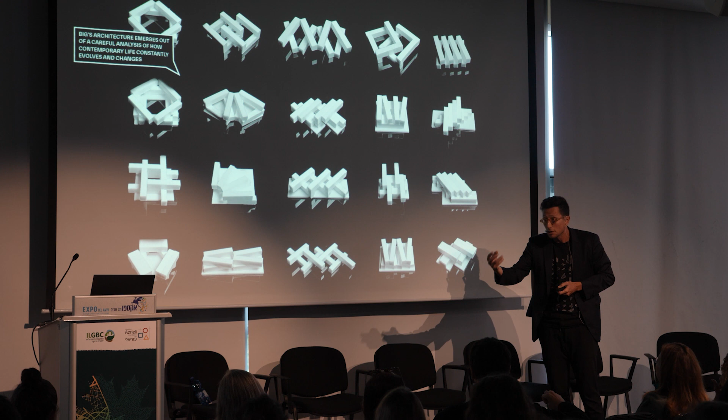Our process, as I was saying earlier, is one of trial and error—nothing is prescribed. We go through research in the first 3 weeks, then try several schemes, testing one against another to see which performs best at multiple levels. In the end you do a selection of 3, and then select the final one that performs the best. This one was Teva.

That never happened, and now we have more opportunities here, but this was the reason we came to the Southern European market—to be able to contribute in this region too. We work across all scales, trying to contribute at every level.

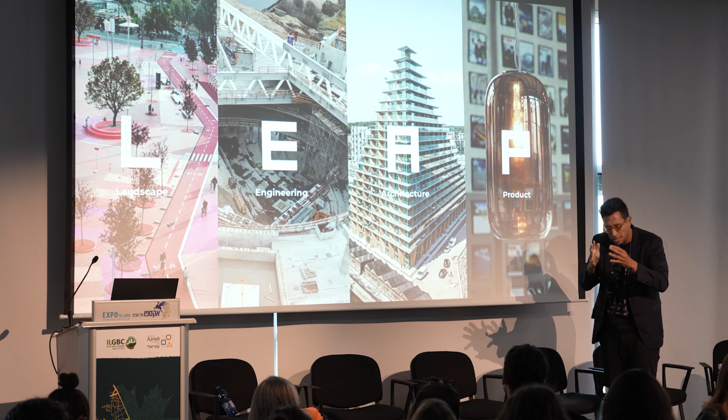We have a group of engineers, structural and climate engineers in-house, a group of landscape architects, because landscape has always been part of everything we do. Of course we're majority architects, but we also design at the scale of the product. It's really holistic thinking, applying the same process of creating value at all different scales.

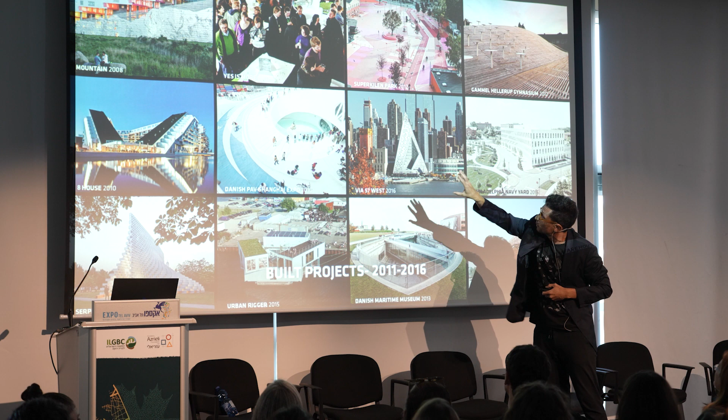This was us when we started in 2005, with the Mountain, the 8 House, and the Expo and an exhibition. By the time we opened New York, again starting with the most basic form of architecture—housing. West 57 is again housing, but creating value through structural design, vertical structure, MEP, and all sorts of things that require simplicity.

London: the gradual increment of projects increased as the offices appeared, and in the end, as I mentioned before, the architecture looks different because it performs differently. We work at the level of community—from the harbor, from harbor baths to parks—and at the level of energy.

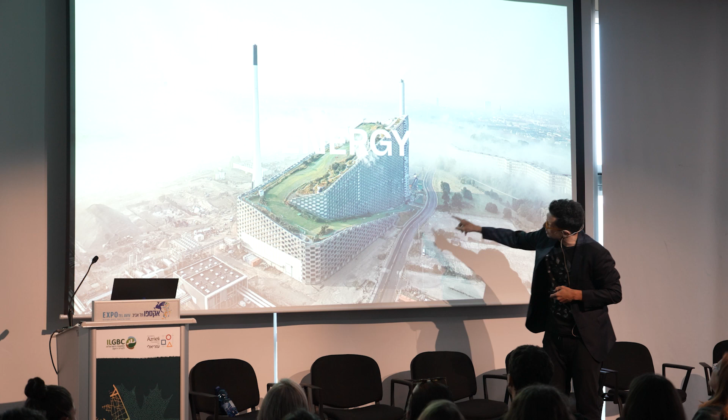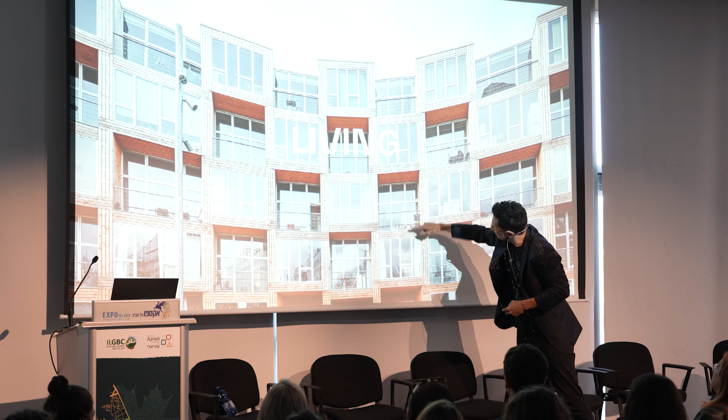This is a waste-to-energy plant, which you can ski on the roof of. At living, this social housing in Copenhagen, you clearly benefit from prefab structures—by thinking of the logic, you create 3.5 meter ceilings in your living rooms. You just have to think a little differently with the ingredients you're given.

Workplace—this is Google in Mountain View. Again, flexibility, shaded by a solar dome.

Towers—this is West 57, where the building creates views, trying to preserve views also for our same client on the back, towards the Hudson.

Culture—this is a museum in Norway, in a sculpture park, that is both a bridge because it connects to the sculpture park, a museum with 2 sizes of galleries, and a sculpture in itself.

Hospitality, which I'll come back to also in Sweden, gastronomy with Noma. Stadia—this is the Oakland A's, where you can walk on the roof, so rather than being a white elephant in the middle of the city, it actually becomes a gift to the city.

So again, this idea of social benefit with social opportunities with every single project, and resiliency - the big U that protects Manhattan from floods while supporting or enhancing the relationship of the city to the sea, mobility with Hyperloop, and urbanism with Toyota Woven City, and many other things.

And I'll come back to many of these, but none of them is doable without dialogue. Dialogue with fantastic clients - two-thirds of our clients are repeat clients precisely because of that, because we nurture a conversation where we really can create transformation together.

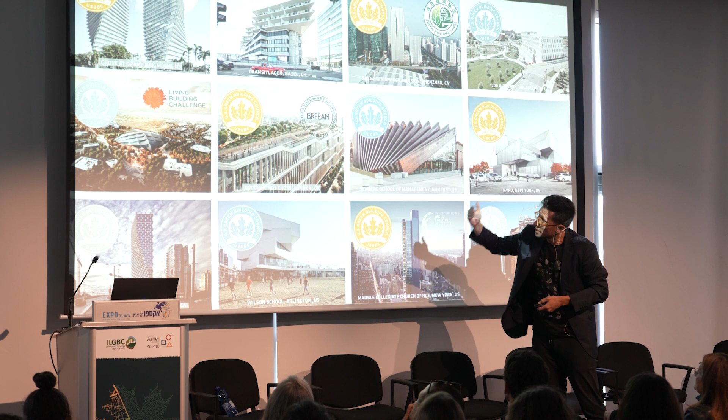And ultimately, as I mentioned already a couple of times, the buildings do look different because their performance is tailored to their own environment. Therefore, at a very early stage, when you start assessing, they already hit LEED Golds and Platinums, even without implementing expensive MEP. So it's more like the passive strategies that are in the backbone of the architecture we're creating that creates different architectures and performative architectures.

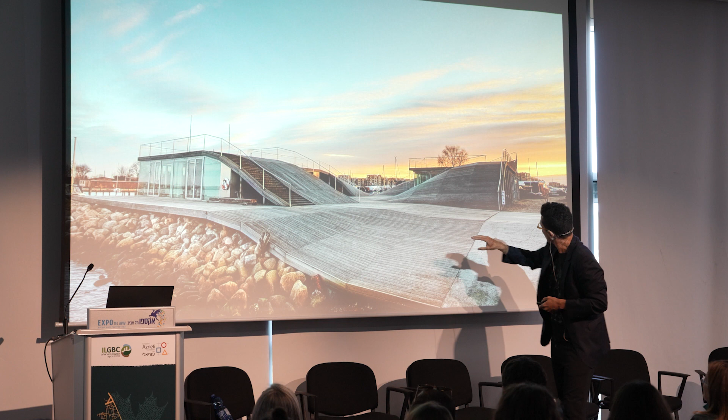So maybe to start with the origin of BIG, nearly 20 years ago, the first project that Bjarke did in Plot was this Maritime Youth House, where the competition for the project was to remove the soil - contaminated - and a large part of the budget was to remove it, then do a small little building on top. Rather than doing that, we proposed that instead of wasting money moving soil, we would actually cover the soil. And it is that same cover that creates new opportunities - shelters for cafes, for the kayaks - and becomes a playful environment where children actually use and create value by thinking about the budget differently.

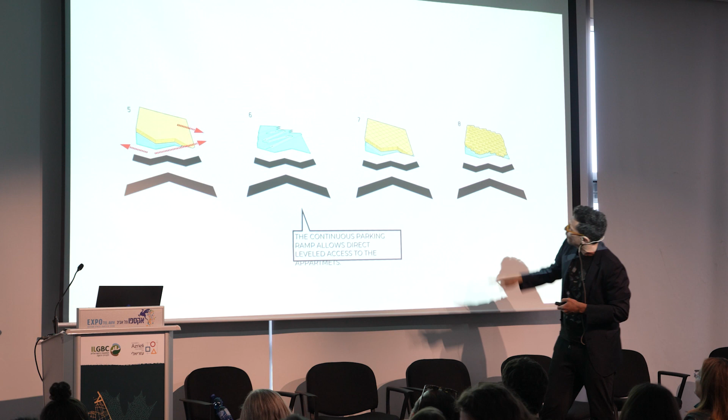So this is another form of rethinking what we're being given - the Mountain, where it was meant to be a parking house owned by the municipality and homes owned by a private developer. Instead, we proposed that the parking house would be inclined to enable the homes to face south, the best solar exposure and the best views, meaning that you can ramp all the way up to your floor and everyone has a home with a terrace with incredible views.

And what is interesting is that it scales from the scale of the urban development to the single family house scale of the surroundings.

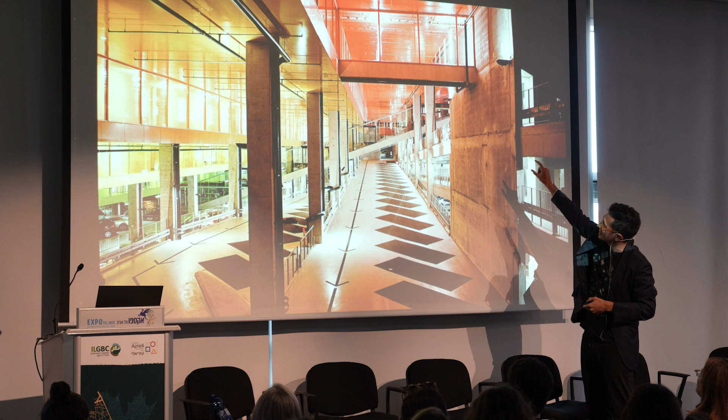When you go up, you travel in this diagonal lift that is actually a standard product in Switzerland. That was my home, 303. I sold it before I moved to Barcelona.

And when you enter, you're actually in this isolation. It's really an oasis, looking into greenery, looking into landscape.

And what is fun is also that these are very basic planters below. So this is a story almost about water usage. The plants are all self-sustainable because the bed of the terrace is a sand bed that slows down the water filtration, meaning that we reuse all that water into creating this Cambodian temple that, yes, is full of spiders, but is also full of nature and joy. So that's just to show that there's opportunity in everything to create self-sustainable systems that enhance biodiversity and create well-being and biophilia.

Then also, one of the first towers that we did was this project in Shenzhen for the Shenzhen Energy Company. We won the competition because we proposed this - it follows the master plan.

It's a very simple building that faces south and north. So towards north, we proposed that the facade would be a zigzag facade, like a pleated dress of Issey Miyake, that towards north is fully glazed, towards south is fully solid. There's no mechanisms, there's no moving parts. It's a strategy of a simple building that is only solid towards south, towards the sun, and glazed towards north.

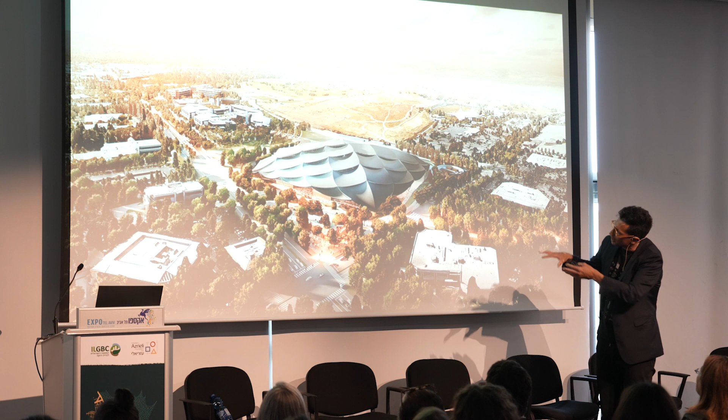And so what makes the building perform beautifully is also what makes it look beautiful, right? And so in that extent, it became a transformative tool also in the thinking of larger scale projects. And that same knowledge, almost at a different level, was what we were discussing when we started discussing the offices of the future with Google in Mountain View.

This is the building finished last year. Every single square meter of the roofscape is solar harvesting. And when you enter inside, it is designed from the single worker, creating a platform that enables change, because they don't know what next month or next year, how they will organize and which clusters they need to be researching on.

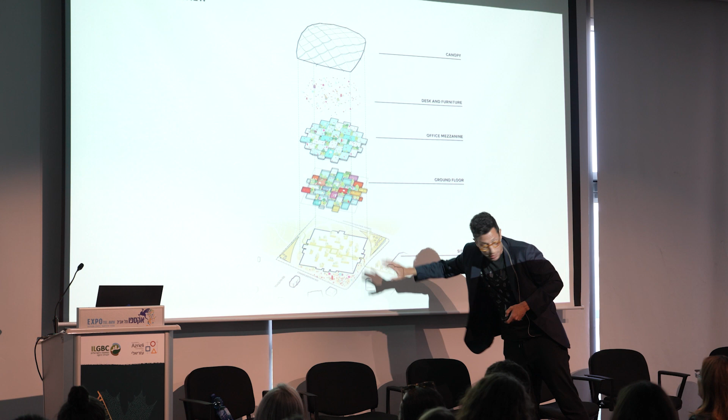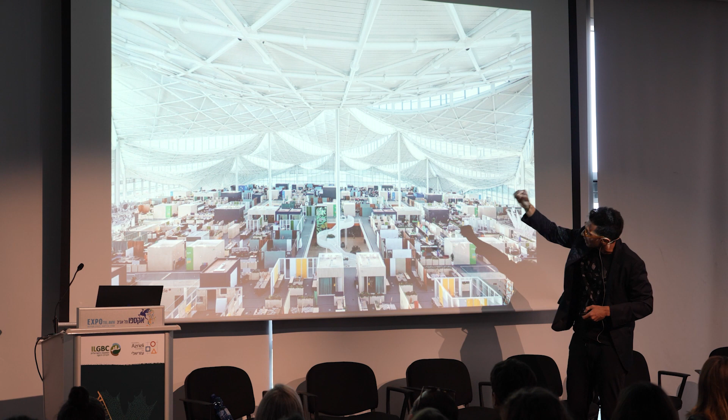So it's just a cover of working environments above with amenities below, and the lower space is completely public. In the end, you have almost like a circus tent that is catenary to minimize the structural impact and the materiality, and below everything is flexible of change. So these are the spaces you have, render and reality from the exterior and the interior.

This is Bjarke on top of the PV shingles. These are PV shingles that we've also developed with a company that is now offsetting and selling them. They're scales, but they all harvest energy and enable you to do all sorts of different things. And of course, there's water drainage as well as it harvests energy.

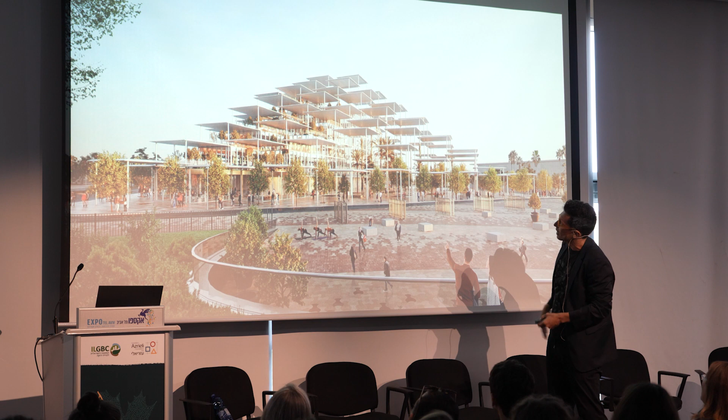And the same logic in a different constellation was what we've done for Sevilla, as I was talking before. This is the future home for the Joint Research Center in Sevilla. Looking at the human scale level, it's transparent, shaded, almost like a light canopy that protects the building underneath. In the front you have this plaza populated by colonnades of trees and colonnades of columns, and on the back a garden for the users, for the JRC community.

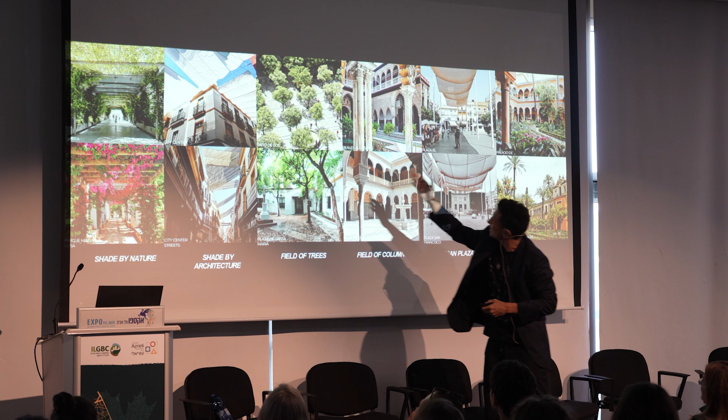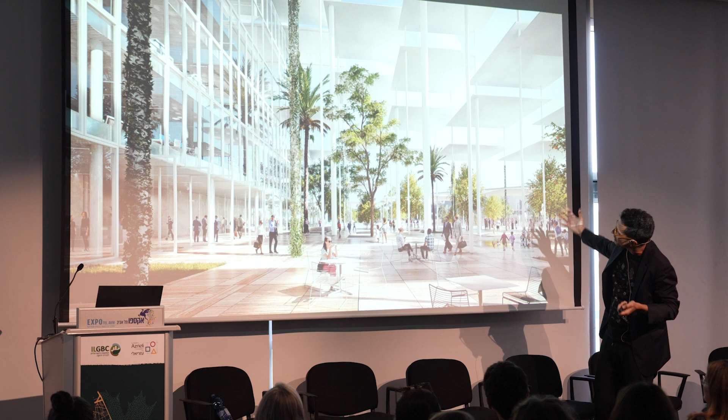It all started, as I was saying earlier, by analyzing what Sevilla is like. It already has these colonnades, vernacular colonnades, contemporary colonnades, natural colonnades, and shading elements. So it's the mixing and mingling of nature and man-made solutions to provide shade. In a way, the building uses that same DNA in its backbone, and we've done that by covering the entire site, harvesting in its totality the sunlight.

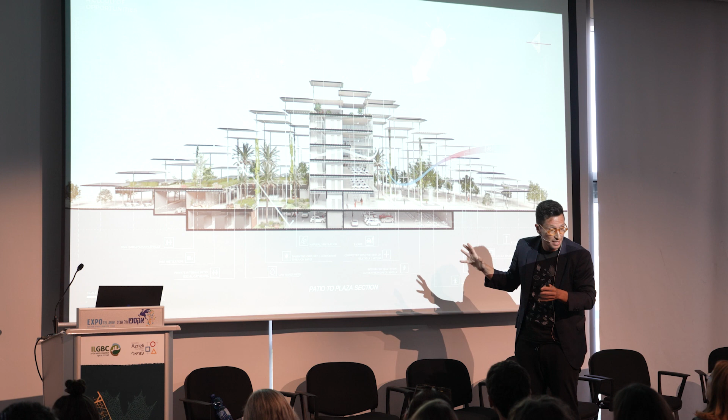So here you see that the canopy that protects the public realm is the same canopy that protects a very simple building. The architecture is extremely simple. And precisely because it doesn't cast direct sunlight, it enables us to have more glass. It enables us to consume less artificial energy because you're using daylight. Also operable windows—all the basic systems and strategies.

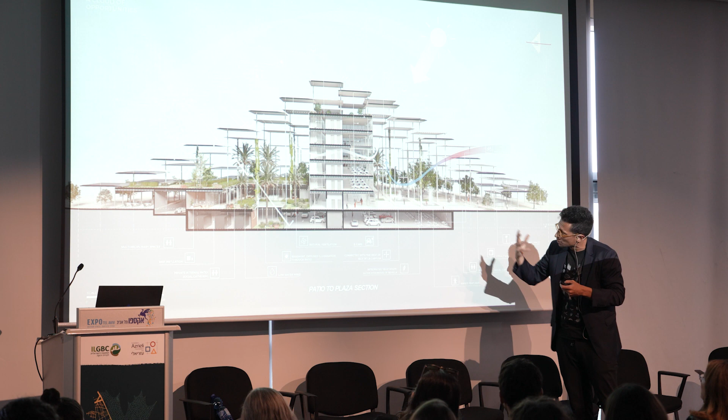Water collection also happens in the pergolas, not only sun but water, and all of that gray water is reused into the gardens in the front and in the back. So all of this is a collection of passive strategies that enable the building to have a very contained performance and a very high energetic harvesting.

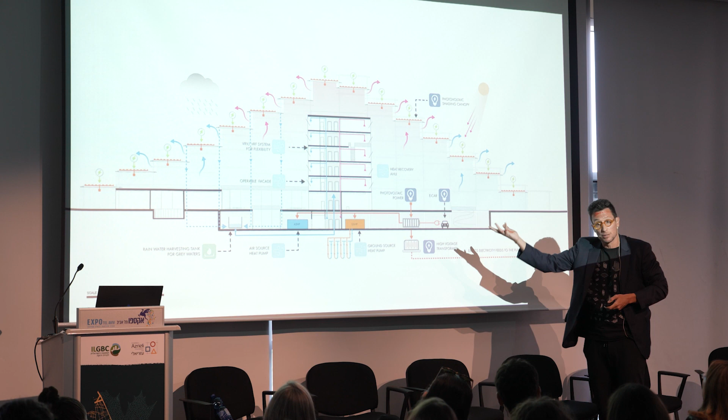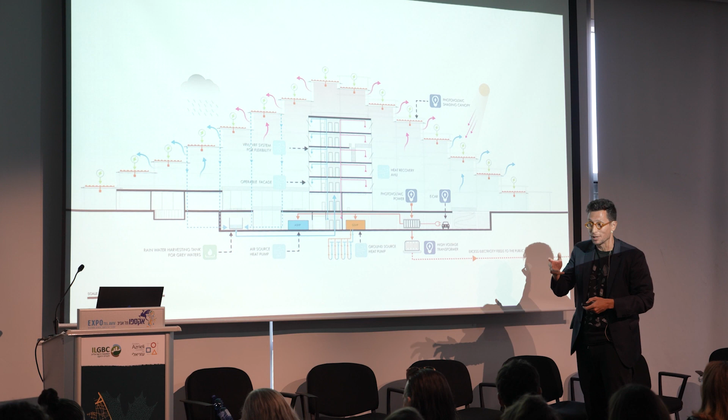And that brings us to that 50 plus extra energy that is going back to the city. So if all projects think that they need to produce a surplus, not just to break even but to actually contribute, our conversation about energy supply, demands and necessities would be a completely different one.

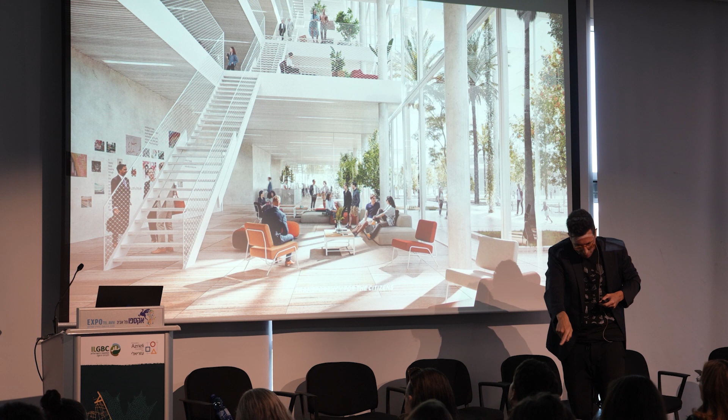So in the future, when you enter you'll be able to park your bike, promoting soft mobility, when you enter the lobby. You'll also have almost like not a vertical void, but a diagonal void, where you can actually see your friend and your neighbor downstairs and meet in the space next to it. So it actually promotes vertical congregation, what otherwise would be a segregated community.

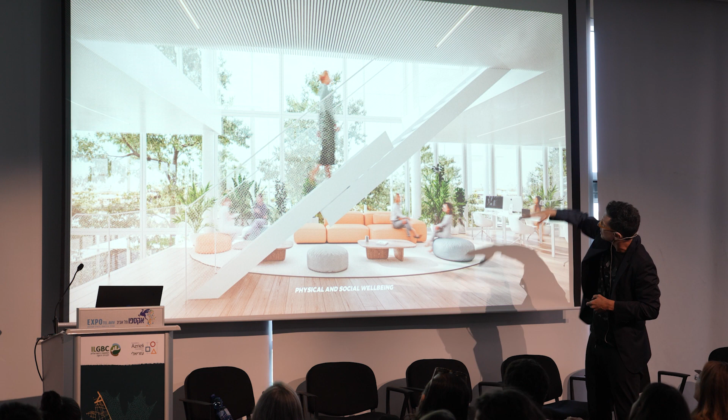So you see your colleague one or two floors below or above, and you might be able to take the stairs. In this transition is also where you have the hangout spaces, but the office space again is flexible. So the future of the spaces is flexible spaces, providing a canvas for transformation.

And then on each side, the building really does this stepping because it follows the canopy, creating terraces on both ends with incredible views towards the city. So it's this added value, this addition of opportunities on all different fronts, that by just opposing the canopy with the logic of the building creates this new set of opportunities.

And then, of course, Nir Lechem, who is an Israeli architect that came from Moshe—Moshe Tzur told him, if you're leaving me, you should join BIG in Barcelona. So he did. Nir was working on JRC in the competition, and he's now running the project on JRC. So he's trying to learn Spanish.

On campus, I think the logic of solar shading and comfortable communities came through this campus for education and sports that we're doing in Cyprus, which is a renovation of an old stadium and a new area for an athletics club, with an addition of program. Again it's akin to what we're doing across Southern Europe and the Mediterranean. Cyprus is extremely warm, so what we created is a constellation of programs spread throughout the campus, connecting the more urban area to the more park-like area.

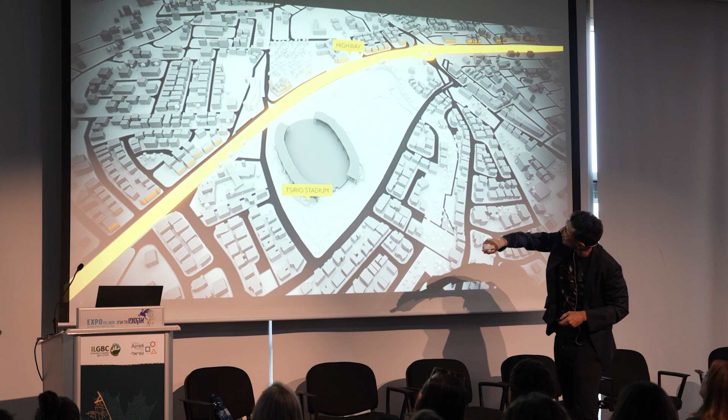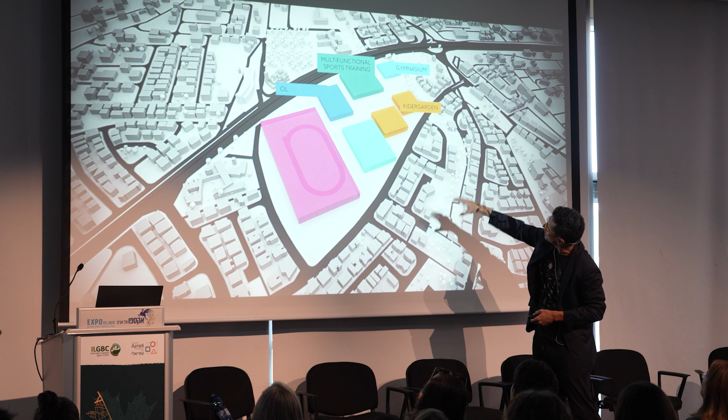On one side there's the highway, so people will arrive at the stadiums from two ends, walking through the existing, almost thin water line, which creates greenery. Then there's the creation of schools focused on sports, with a component of education and a large component of well-being across different types of sports. So if you're focused on training, you can grow there, learning on all fronts.

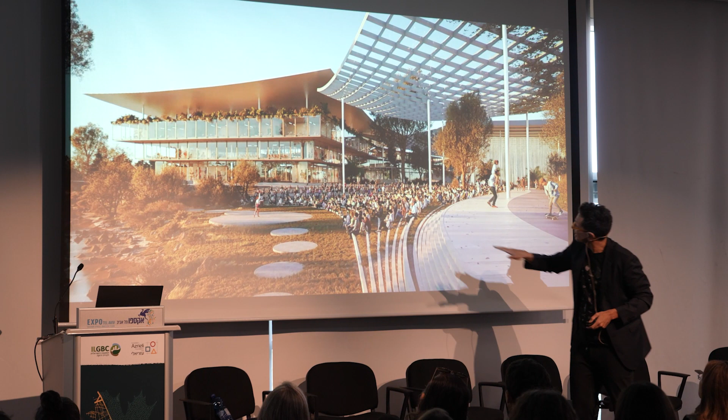So this is a renovation of a stadium. The schools also create a series of different opportunities, connected with this idea of living on a campus. The same applies to the pool. Each program explores that architectural principle in a different manner.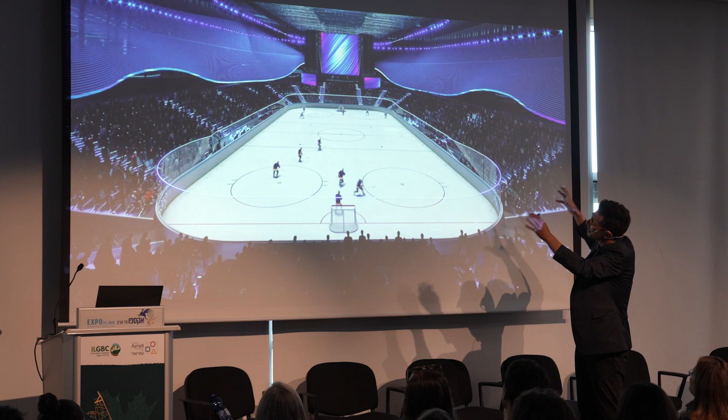Then there's an ice rink that is also capable of doing different things. In the stadium, you can actually access it three-dimensionally all the way to the top, so you can walk all the way up. Even with the ice rink and the pool, there's 20,000 square meters of additional PV-supplied energy.

So at the ground, you see this walkway, and above, it's completely shaded.

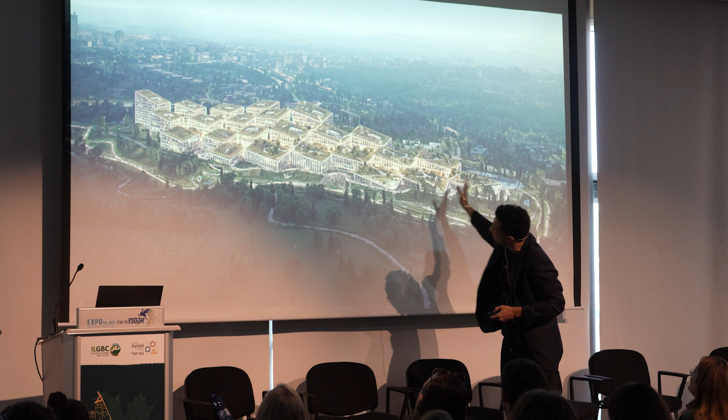The building balances its own square meters rather than being a flat four stories. On the side of the highway it rises to double height, and on the side of the river it decreases to human scale, so you can walk up. This protects from highway sound and enhances the relationship with the river. When you walk through the central street, you see all the way down to the river as the buildings decrease in scale.

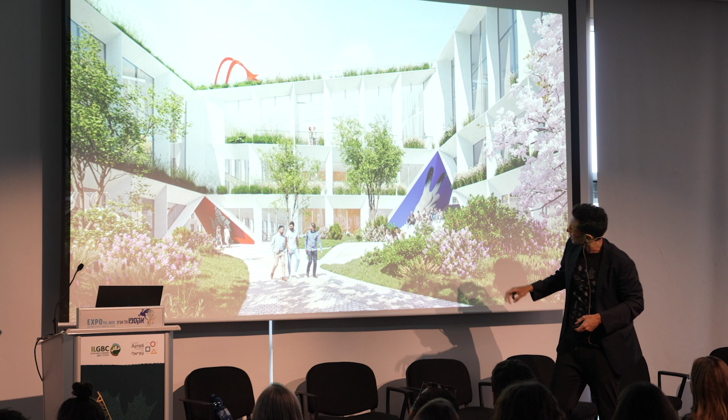You start having larger plazas, cut underneath so that you connect to the next, smaller plazas. The building works as many buildings, but also as one building because they're all connected as a single office space for different departments.

At the ground level, all plazas are connected by structural gates that are new art opportunities—we're inviting several different artists to experiment. Above, the roofscape is all one continuous surface, so you have constant daylight, constant connectivity, and constant exposure to your colleagues.

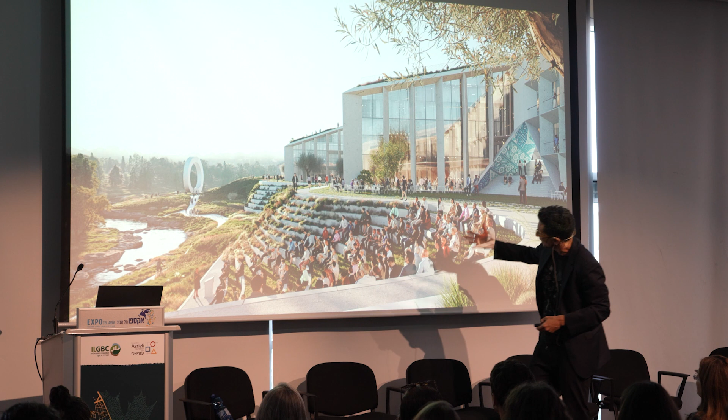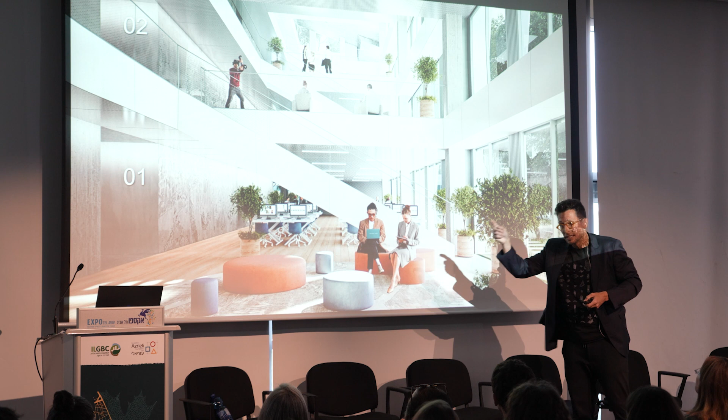As you arrive at the riverfront, where the buildings are smaller, you also have a new set of opportunities, where informal auditoriums will protect you from extreme rainfall, as just happened this winter in Portugal. It creates this whole new set of opportunities and relationships with nature. Similar to JRC, we often explore this idea of a traveling void that promotes connectivity throughout the vertical building.

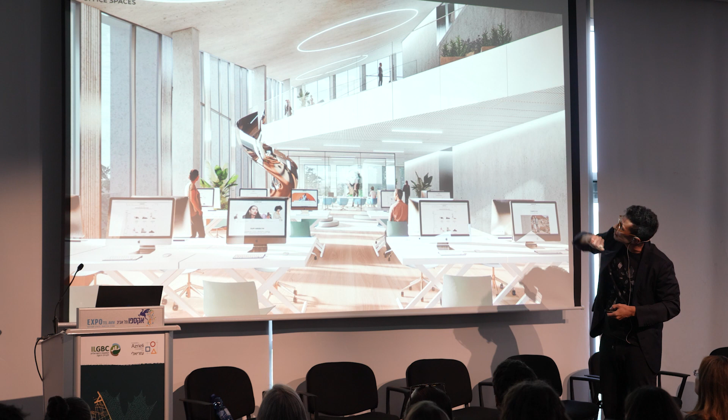Above all these moments where it meets the inclined roof, you have these opportunities for new types of mezzanines, and when you arrive on the very top, you can exit the building again. So you can enter and exit the building either from below or from above. The middle space is just a connection in between a park experience or an urban experience.

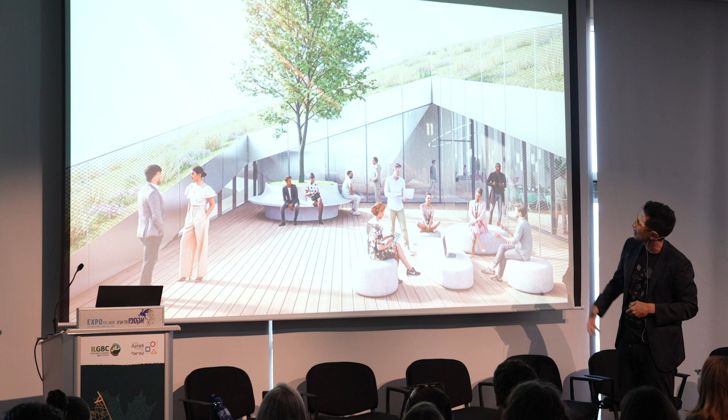Above, each building has these terraces that oversee out into nature, so you can actually run all the way up. At the riverfront you have a different set of amenities, from auditoriums to canteens to kindergartens and well-being. In the end, the art gates are just a setup for whoever wants to, or whatever artists want to experiment.

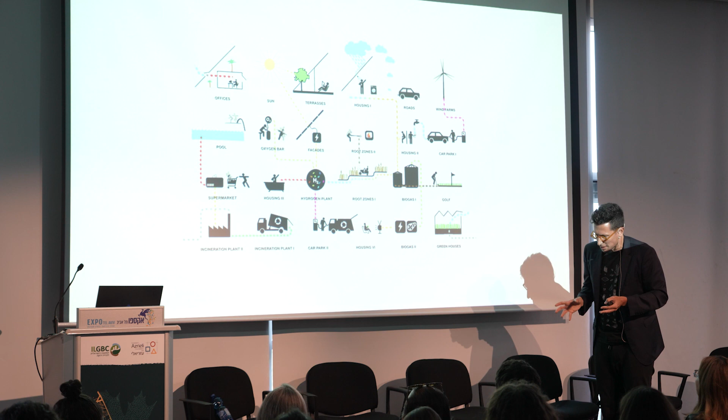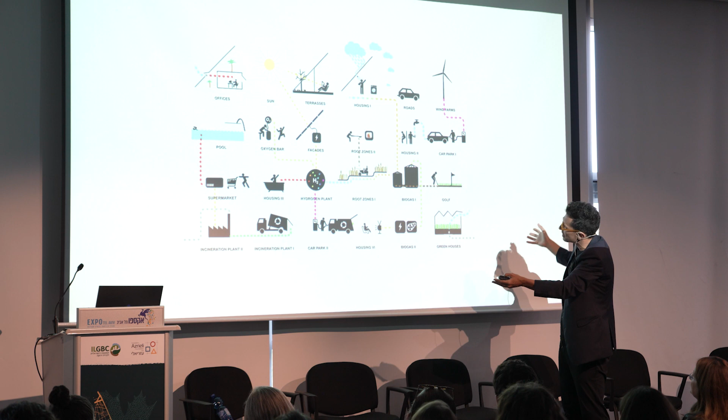I think ultimately, if you look at sustainability, the further you look into not buildings but campuses, you're looking into a toolkit of ecosystems. It's not going to be just PVs, it's not going to be just A or B. It is really a system of synergies that need to feed into one another.

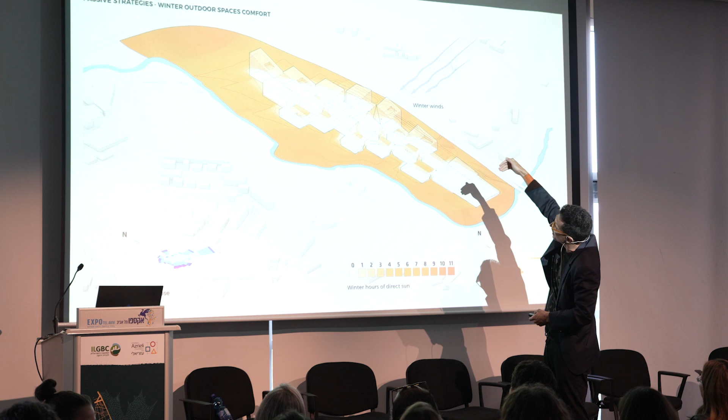So what we've done, once we were looking into passive strategies, you realize that the south summer breezes, we started working on them to be perfectly aligned with the gates, meaning you have the summer breezes breathing into all the plazas, onto the back. The north wind was protected against—we have the nortada, the cold wind in winter, that is completely protected against, so we don't have gates on the north parts. In a way, it creates microclimates that are beneficial for different phases of the year.

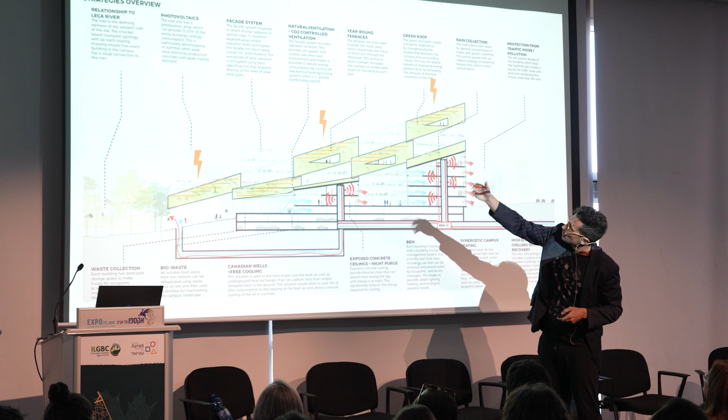And then within, the campus has a series of different strategies, from PVs to the facade, cross-ventilation, green roofs, water collection, thermal mass, and all sorts of Canadian wells and bio-waste, that actually harvest the cooling from the river into the building itself.

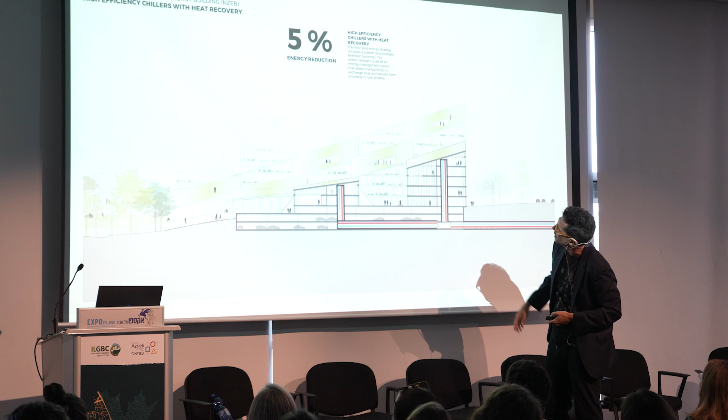So in the end, sustainability is a sum of different parts, both from the energy reduction provided by the Canadian wells, from the chillers' efficiencies, from all sorts of green roofs and facade systems, natural ventilation and controlled environments.

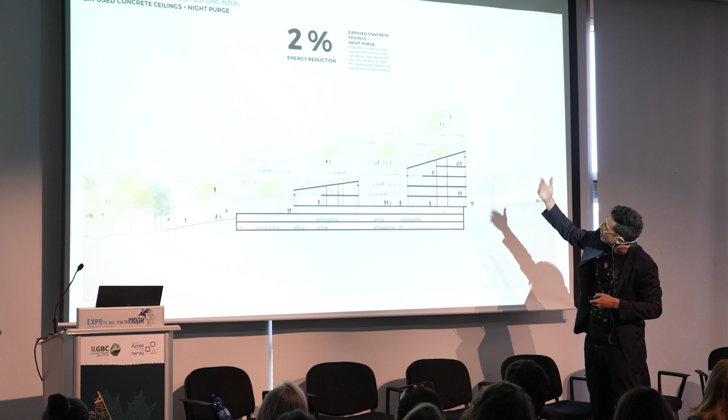Also energy reduction on all sorts of other systems that, in the end, and of course the south exposure being protected by your biomass and by the greenery—in the end, all of it is a sum of all parts that enable you to consume 60% less energy.

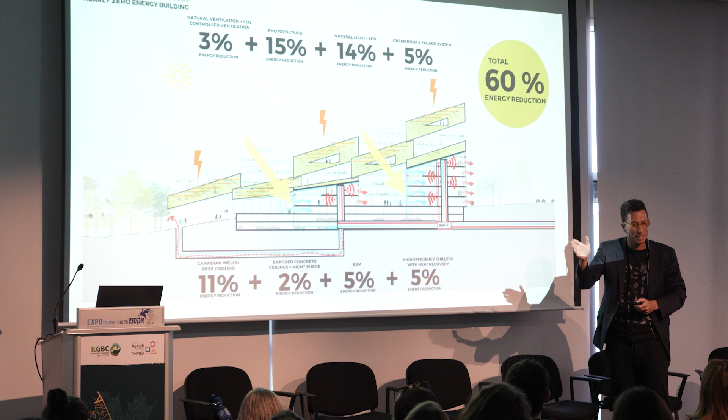So it is trial and error, it is bit by bit. There isn't one overarching solution every time. It is a discovery on how you hit the most efficient target that you can.

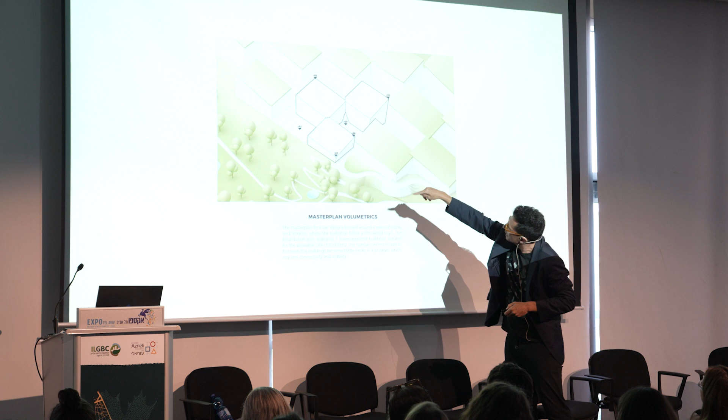At the beginning, it was these 3 volumes, but we converted that central element into the lobby of the building, and it created these new plazas with new opportunities.

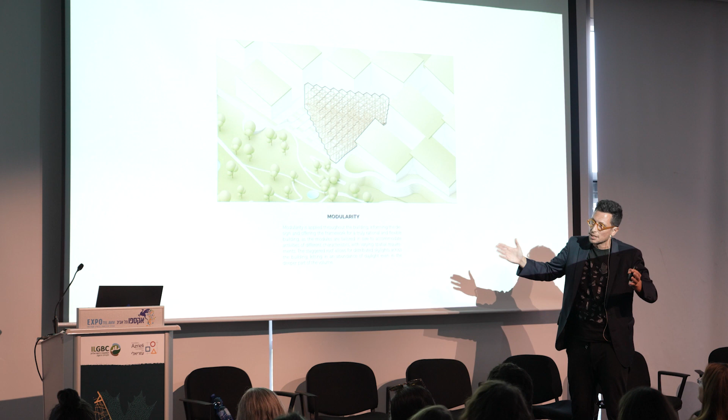And the entire thing is a repetition of the same ideal CLT module and spans. So it's really looking into the spans of wood and creating almost like this Cartesian grid that is just removed with decks—you remove the decks as you create different kinds of spaces.

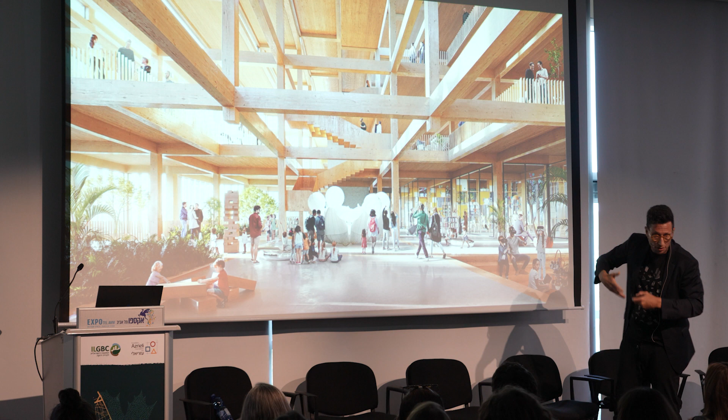So again, future-proofing: in the future, if you have more necessities for GFA, you close the building, you close the decks, or you open the decks, and this enables you to have all sorts of different evolutions and phases in the building's life.

This is for all sorts of different educations and experimentation, from little ones to grown-up ones. But again, you have these 3-dimensional spaces with this Cartesian grid that is just based on the most pragmatic structural array, always with sunlight and daylight in the building.

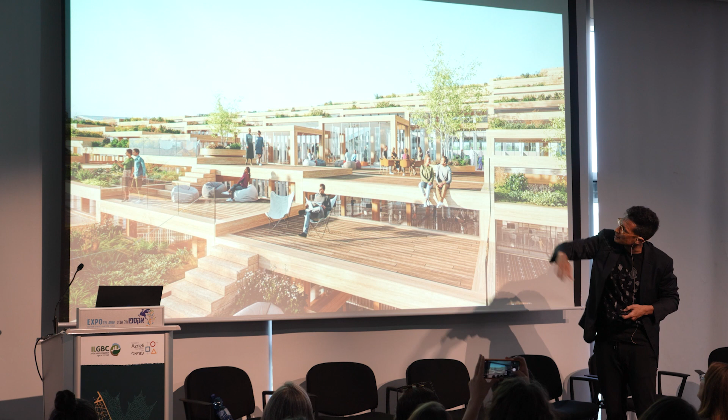And as you go up, you have the opportunity to come out and enjoy the sequence of terraces, where only the central space is walkable and the rest is actually PVs.

Also in Zurich, in cross-laminated timber, CLT—we just won this competition for the extension of Zurich Airport, where it's also a triangle with a tail, but where the building opens up to incorporate the tower itself.

It's a very simple building that creates a central space for simple connectivity and circulation, where the tower emerges and erupts through the glass. But the rest, the entire materiality, is very simple. The tectonics are those of wood, and it's really about understanding what that entails and working from those principles.

So you start seeing here the gate areas, the different sections of the building throughout its length, and the different spaces, opportunities, and connectivity throughout the different three-dimensional spaces. And then also in wood, in CLT, like we just finished...

...this furniture factory in the north of Norway, where typically infrastructure and industry carry all these connotations. What we've been discussing is how can we actually create an icon for visitation, an icon for social engagement, while being productive and positive. So Vestre is a combination of different programmatic needs: the factory, warehouse, the coloring and wood factory, the assemblage, and of course a part for exhibition.

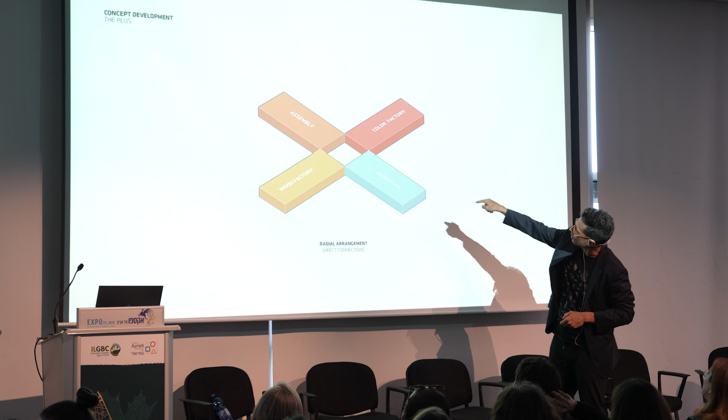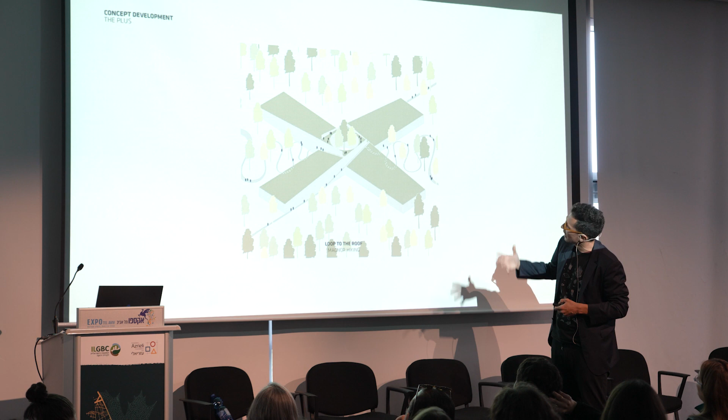So all of this is connected, created in one of each branches, and in the center you have the logistic roundabout and the exhibition at the very heart. And in the end, all the vegetation that was removed from the ground is replanted on the very roof. So these were the renders, and this is currently what we have.

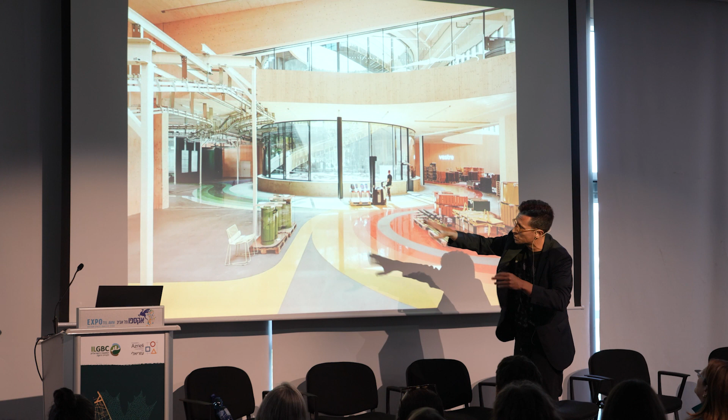These are pictures of the existing factory already working, and the coloring works for the automated machines to follow, and also to discriminate the different assemblage lines throughout. But again, you're in the middle of the forest in a mass timber building, articulated throughout all the different productions.

So it really becomes a didactic space, a space where everyone can come and visit and walk through. But again, the architecture is very, very simple. And there was all this effort in the beginning, in the footprint of the building, to actually remove all the existing species and replant them on the roof.

So it's a zero footprint and harmless intervention that creates a new type of industry, one with zero footprint. This is the first factory that produces no offset of energy and operations. So here you have now all the reused greenery and the floor plan fully immersed in the woods.

Also in Sweden, almost at the opposite scale, we've done this one bedroom. So there we're talking about reusing species. Here we're talking about capturing species.

One of the main things with this bedroom at the Tree Hotel—these are 34 square meters—is it's a wooden structure with wooden boxes. But here's the thing: this was the 8th room at the Tree Hotel, and the other rooms are incredible interventions.

You have Tham & Videgård's Mirrorcube, I don't know if anyone knows it, and other very unique and incredible interventions integrated in the woods. So we were really wondering how we could contribute after so many great things had already been done.

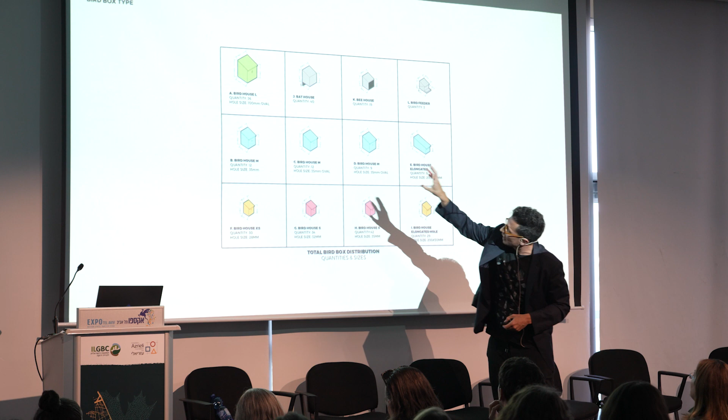What we realized is that in Sweden, because of deforestation, the birds have moved out. So we evaluated and analyzed what species there were and in what seasons they came, and we created a toolkit of bird boxes adapted to those sizes, to those specific birds, in different amounts, depending on how many birds come.

Of course, we didn't put the owls next to some other birds, because one eats the other. But in the end, it becomes about 350 bird boxes, with bats at the bottom and bees on top. So it's really about capturing biodiversity.

When I slept there for the first time, there was already one bird. I was the first human being sleeping there, but definitely not the first being. And now it's actually populated with birds all around, so it works as a call-out for the surrounding biodiversity.

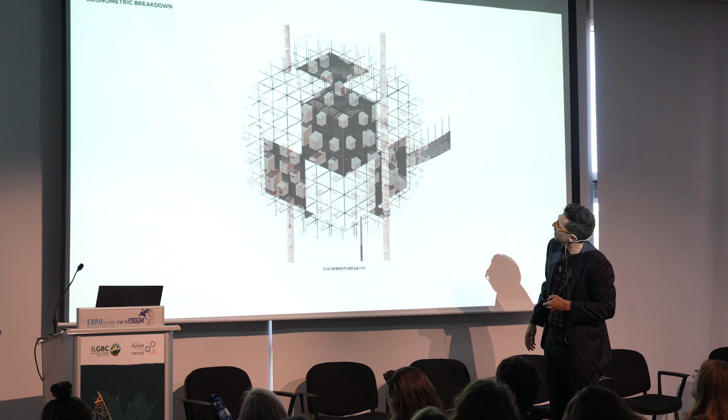In the end, the inner cube for human living has each corner either solid or glazed. When you look inside, there's a double-height space for living, where you look down into the corners, and above there are the wet areas with the toilet and sauna, and above that the bedroom.

So when you enter, again, accessibility is a must, so you enter straight in, able to enter on a wheelchair. This was the opening with Kent—he retired right after finishing his 8 buildings, no more after that. He sold the Tree Hotel, great move.

But I was the first one sleeping there, and it's always a pleasure to finish construction and help them out, especially on this last bit right before the opening. When you enter, you have this 6 meters down opening to below, and this double height space to above. Again, the construction of the building is majority wood and burned wood cladded.

So it's really thinking of how can you create value with this. And as you were mentioning, the showers - I'm not even mentioning this, but of course, you see no sewages, you see no water. The toilet is produced in Malmö, in the south of Sweden, where it burns into ashes, so you just deposit the ashes into the plants. So there's no system of sewage. The water is all reused - the shower is recycled and reused as well.

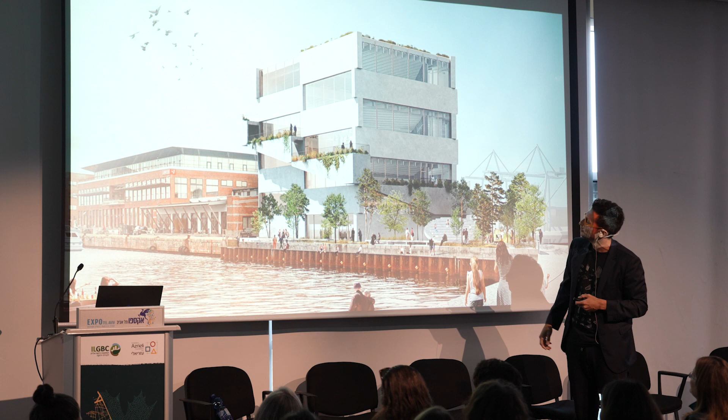So it's a self-sustainable ecosystem of usage and engagement with nature, and I think that's the fun part of it. But just to mention, on the opposite end, our headquarters - this is the building we're going to be moving into in October. This was a picture from a few months ago.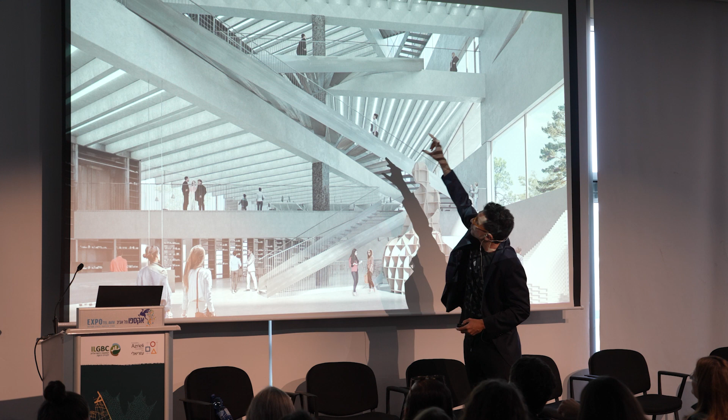All of these load-bearing beams are the structure of the building, which otherwise would have to be far bigger if you had wooden columns everywhere. Again, it's future cement, 30% less consumption of concrete. This is the only column that exists. There are 3 different types of stone, from the most dense Norwegian stone to the least dense - stones from different regions - and everything else is walls that are load-bearing.

In the end, you have this constant rotating double to triple height space where you can see your colleagues all the way to the last floor. It's inclined because you have the egress stairs, plants and balconies outside. As you go down, this is how you see your colleagues above and below. This is Sheela, our CEO, 3D scanned, in all our renders. And this is your exit out with the gardens, etc. In the end, this is what you'll see very soon.

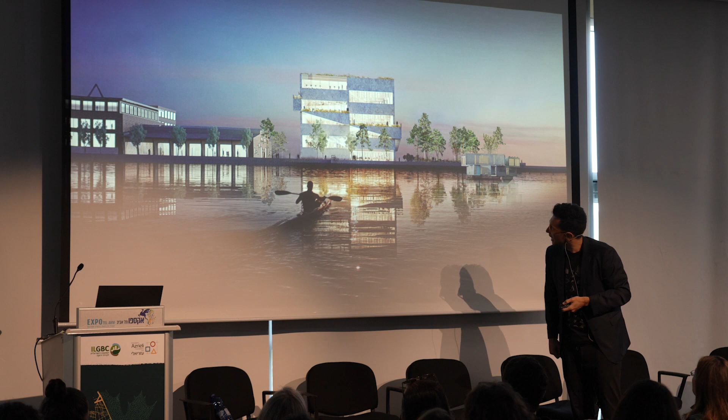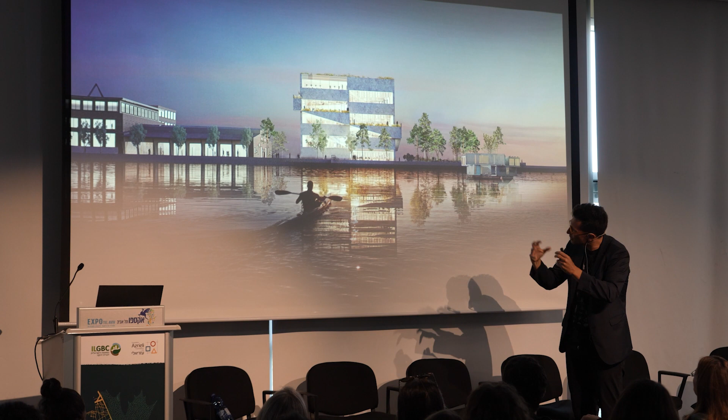Each material is adapted to each performance and each program, so we always have to think critically and not just do wood wash or greenwash. Everything needs to be purposeful and tailored to the best performance and best outcome possible across all spectrums, from ecological to social to economical. So it's not one solution, it's really a compilation of solutions.

What was also interesting to see is comparing the embodied CO2 versus the operational CO2 of the building - the operational impact was very reduced. When you look at the full footprint, you actually see that the concrete of the exterior walls is not such a big impact, and the overall numbers put the building below the maximum standards in Denmark, which all buildings now need to follow. So it's quite interesting to show that you can do things differently without the prescribed, contemporary narrative for sustainability.

One of the points we talked about earlier was waste to energy. One of the first projects of BIG was the waste-to-energy plant in Copenhagen, where for the first time this technology - most of the energy in Copenhagen comes from burning waste - produced no toxins.

So what we proposed is how the architecture can manifest that same experience, because it doesn't harm the population, doesn't harm the birds. We proposed a park on the very top, but we also realized the building was so big that it was the same scale as the ski slope in southern Sweden, where Danes go to ski. So of course we proposed a ski slope on the very top.

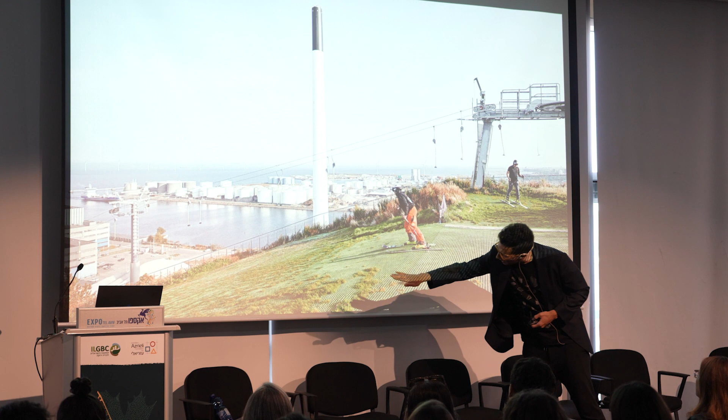Here we start seeing the burn of 3 kilos of trash gives 5 hours of electricity or 5 hours of heating. So converting mountains of trash to mountains of snow is fantastic. Of course, it doesn't snow many times throughout the year, so we propose that alpine skiers train on these green peaks in the summer, where greenery can also grow through. We developed a pattern that avoids creating dilatation joints.

So we also got that development. Now when you ski, you don't fall. It's a continuous green roof - you actually ski on grass. Now it's even more grassy than before, so you can ski all year round, or even in your bathing shorts, if you don't fall and burn yourself.

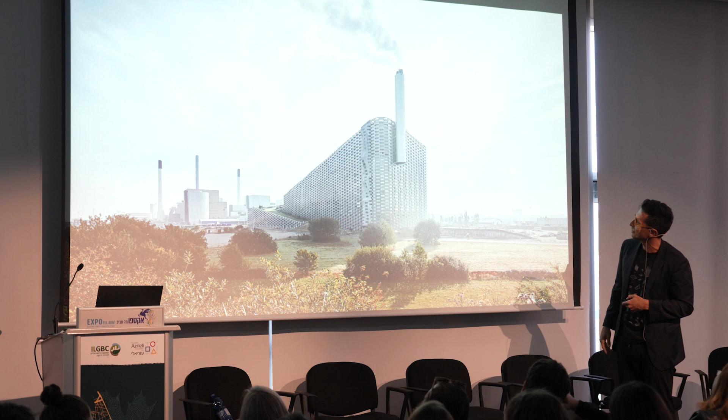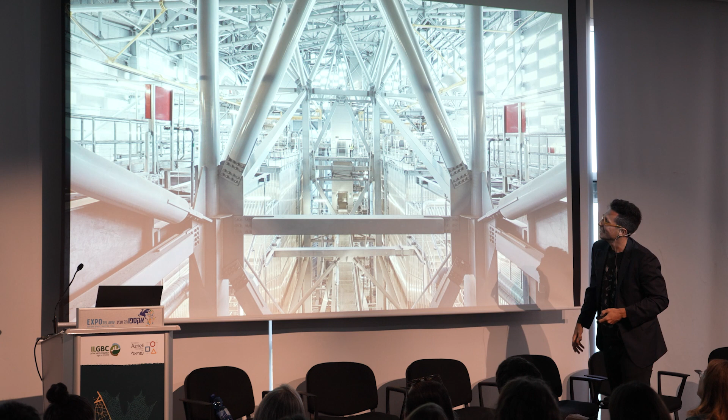And in the end, because the height is so big, we also propose the tallest climbing mountain in the world. So if you have the physique for it, be my guest. This guy clearly does. But inside, when you go up, you also ski down, and when you go up, the elevator is glass.

So you can actually see the laboratory inside, and see the mechanics of everything as you pick up your skis and walk up and restart again. So it's also learning as a toolkit for society. And on the very top, if you don't have your skis, you can always go up - there's a bar, and you can have the best viewing point in the city.

So again, if the mermaid is the Danish landmark, hopefully this one becomes a future hedonistic landmark of social sustainability. And just to talk on the two last things at a broader scale - because when we talk, we always discuss the architecture, since that's what we're trained mostly to do. But we also need to think of cities, buildings, infrastructure and parks.

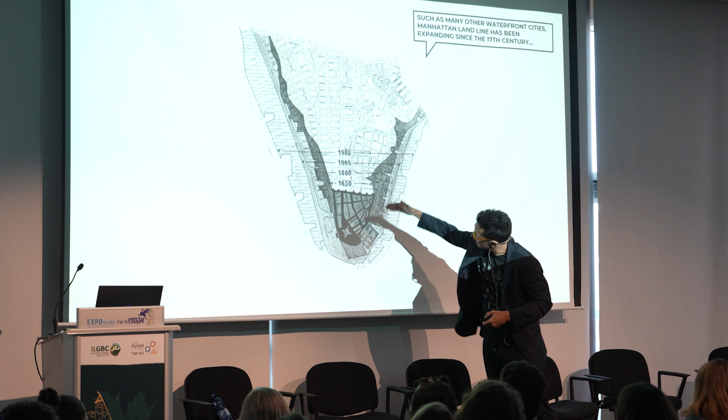So the project for the 10 miles protection of Manhattan emerged from Hurricane Sandy, which pretty much wiped out half of Manhattan and made it all dark. What we've proposed, and the reason for this, is because cities have been gaining territory from the seas. So now what we're exposed to with climate change is really that the sea is almost regaining, recapturing, or aiming to get back at it.

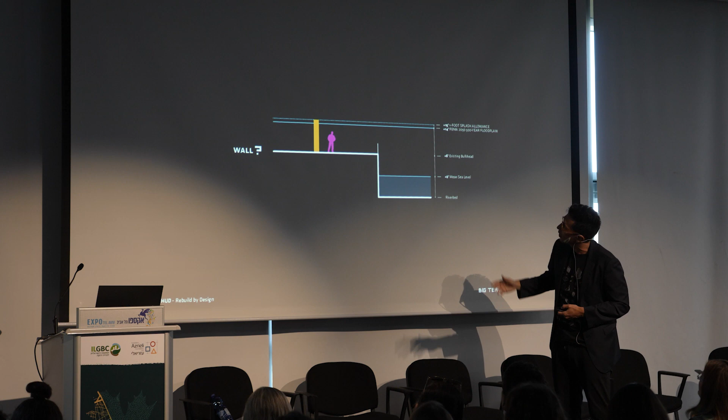So we proposed, what if we could actually merge both? We're designing infrastructure from scratch, we talk to the different populations, and we discuss different scenarios where rather than having a wall, you can have all sorts of different opportunities. It becomes more of a pleasureful toolkit of scenarios where sometimes the barrier is a pathway and a meandering situation that plays with the topography and with species, but still protects the space behind.

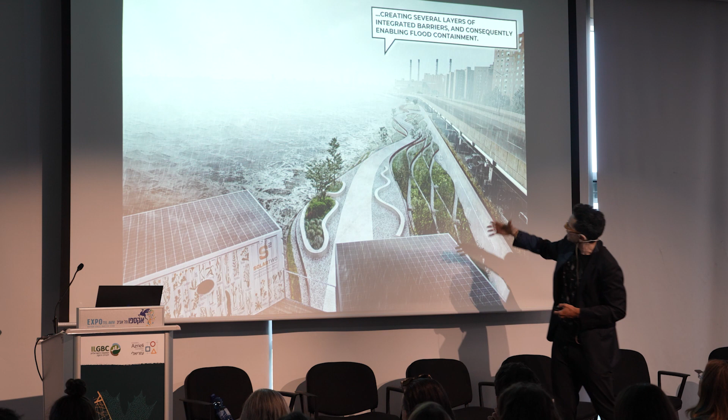Other times it becomes harbor paths with different heights that still protect the barrier. Other times it is a gate, but it's also a Sistine Chapel for public art, for street art, that can be closed in different moments. Everything is an opportunity to actually expose and protect the city, but also create and enhance the relationship of the city with the sea.

And again, this has been a process of 10 years of talking with each neighborhood to understand what they wanted to see, and we redesigned each park so that it had its own program. So again, public discussion - one minute.

And the last project is actually at the scale of the master plan, because mobility is something that we discussed last year - it is something fundamental.

Revisiting Toyota's former grounds of production into their new R&D center, we looked into all the programs that they had. We looked, of course, into the ecosystem and how to build a sustainable ecosystem through it. And the scale is such that we looked into mobility from pedestrians to recreational and to vehicles.

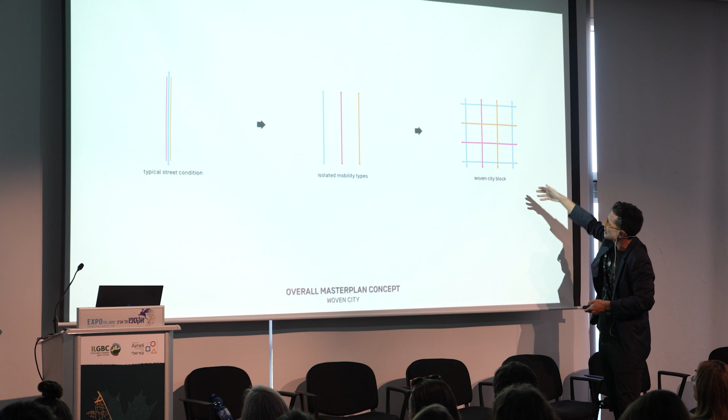We created almost like the super islands in Barcelona, where you have segmented mobility. That created, from the city block to central plazas, into public courtyards, a scale-up scenario where even the plazas can become central plazas or central parks. So this is a very simple logic of mobility that drives a new type of thinking.

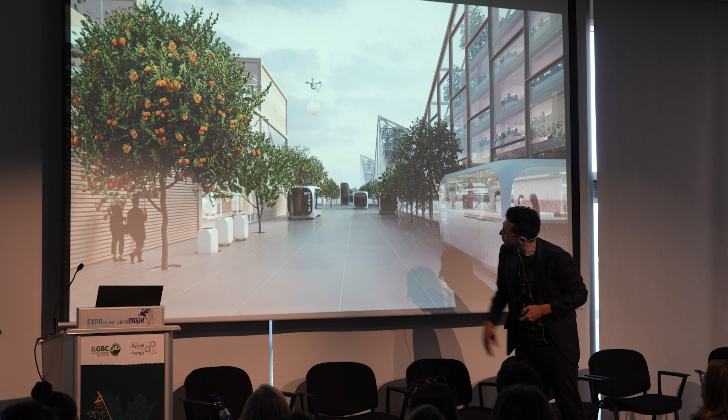So in a way, the future R&D center of Toyota will be wooden-based, of course, with Japanese joinery. Some streets will be completely automated, other streets will be more hybrid, and others full pedestrian.

So in the end, I think it's just thinking sometimes about the basic toolkits of architecture, of social intervention, of mobility, of performance, and really thinking how we can create a better future with all the ingredients jammed up together.